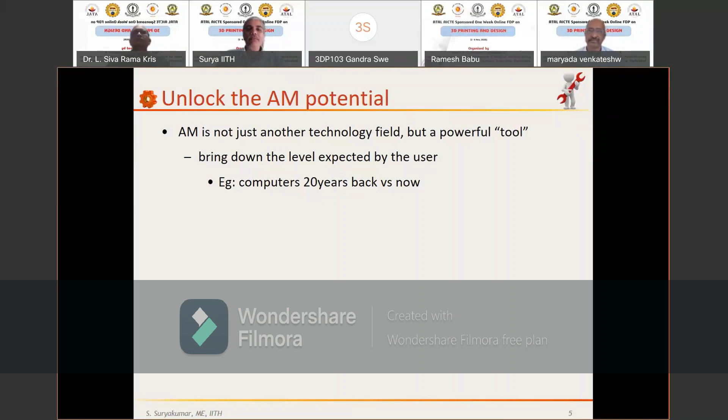AM makes all that unnecessary. Even a 10th class kid, without any necessary background, can design, conceptualize, and make his or her own models. That's essentially the whole idea here. I usually jovially put it this way: additive manufacturing or 3D printing makes manufacturing possible for people with no manufacturing background. It is like manufacturing for dummies. It's like the calculator for mathematicians. Gone are the days when you need to do multiple calculations to do a simple trick or a simple geometry calculation.

For example, the way mobiles have helped your milkman or the paperman compute the monthly bill very quickly. In the same manner, the arithmetic background is not needed, but the task is done. So this is a similar facilitator when it comes to manufacturing. We look at it like a tool, where additive manufacturing is very user friendly and easy to use, and digital fabrication makes all this possible by looking at it like a functional tool rather than as a specialized job.

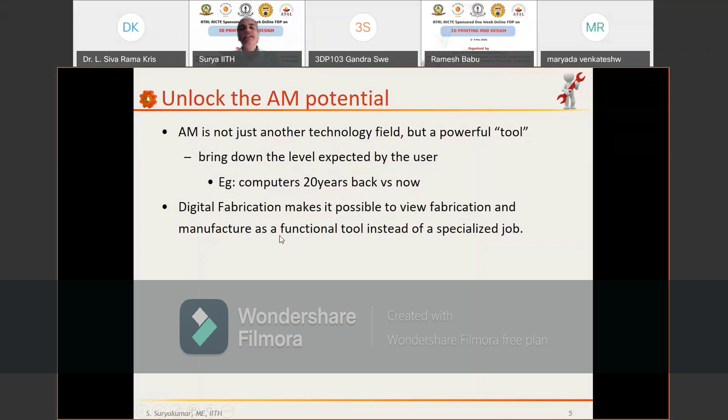And this is my favorite quotation, paraphrased from Mahatma Gandhi: not mass production, but production by masses. I think Gandhiji meant it in the context of mass production and big factories versus rural industries. But the same quotation is equally applicable in our context today, where to make something you needed a setup, a machine, lathes or CNCs or shapers. Now you just have a simple 3D printer which will cost you probably 20,000-30,000 or maybe 1 lakh, and you can make things at your own convenience. So it makes manufacturing possible by the masses. I think that is one of the biggest benefits of additive manufacturing or 3D printing.

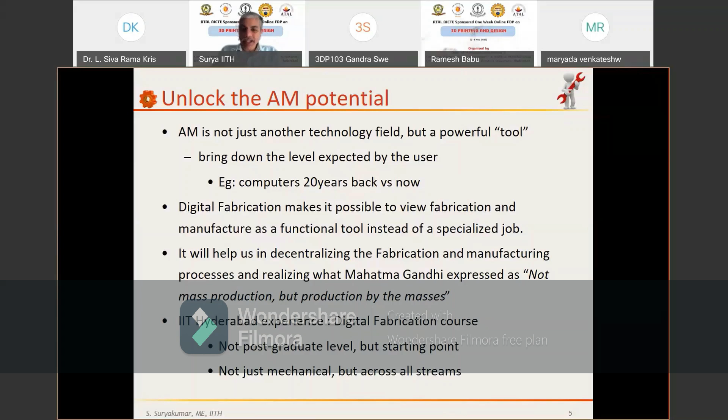And the same also applies in the learning sphere. Computers are a good example. Computers and programming used to be very high level in the earlier stages, then became first year courses, and nowadays schools advertise it, although I really hate that. But the point is that as the technology matures, it becomes easier to understand and practice. The same happens with mobiles. The first time I got my mobile, I read a huge user manual from top to bottom: this is how you add a contact, this is how you delete a contact. And now our kids manage our mobiles better. So as the technology matures, it becomes simplified.

And the same, in our opinion, is true with additive manufacturing, digital fabrication or 3D printing, whatever you call it. Our vision is that 3D printing is not necessarily just a PG level course or an elective, but something very fundamental and basic today for every engineer, not just mechanical engineers. Just like graphics or engineering drawing is the language of engineering today, where you are able to communicate, draw something or codify some idea.

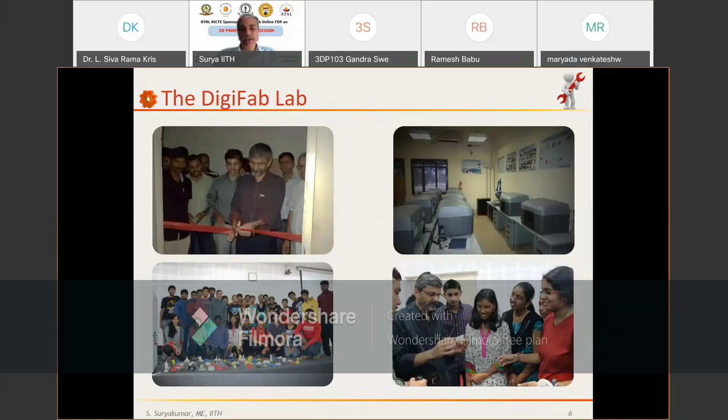We said, look, not as a postgraduate course: every first semester BTech UG student who joins IIT Hyderabad will be taught 3D printing in the first semester itself. And it's not just mechanical, electrical, computer science, metallurgy. Every student who enters IIT Hyderabad has familiarity with 3D printing as a basic tool. So tomorrow, whatever project he or she does, they have the ability to convert that idea into a reality.

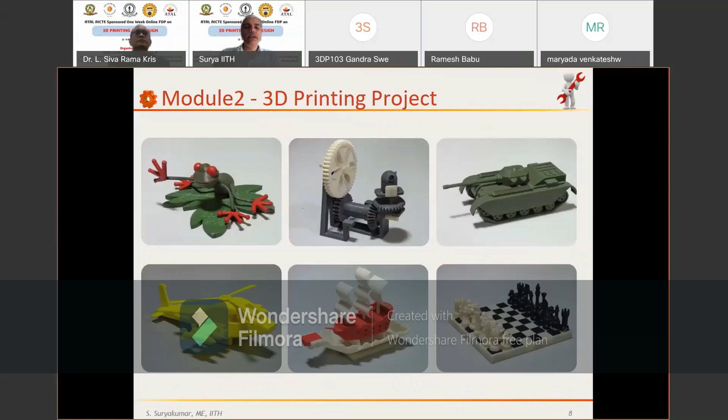So this is how the course goes on. In the first part we teach them CAD modeling, and in the second part they do projects on 3D printing of their own choice. So I think that is the background we are looking at today, where 3D printing is no longer just hi-fi high-end stuff, but a basic tool. And how do we capture that tool? The whole idea is how do you redesign the concept? So these are the various points related to it.

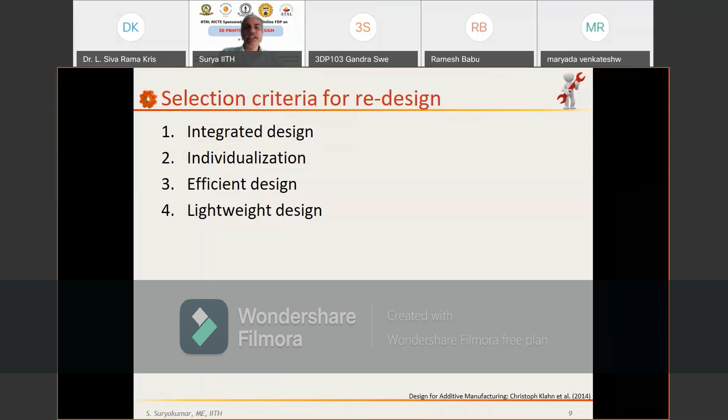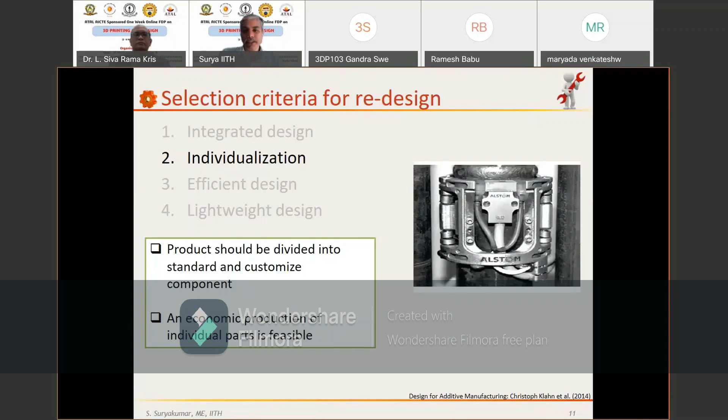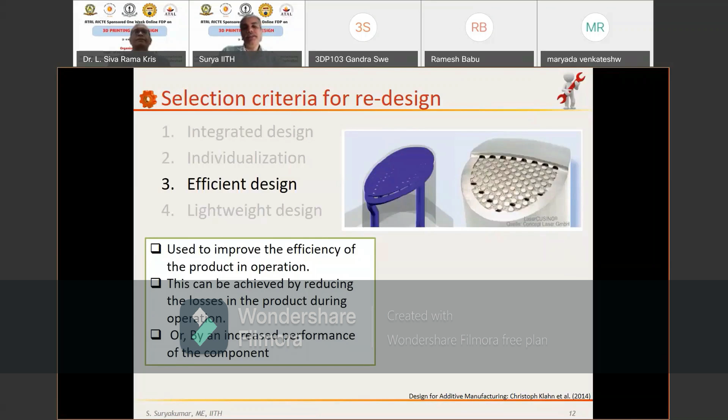The second is how a component can be individualized into a particular product, a particular individual geometry, individual shape, etc. The third is how do you efficiently design the component for the operation or the required purposes, or to increase the efficiency. And the fourth is how do you make it lightweight: optimize the weight, optimize the performance, etc. So these are some general selection guidelines which are given in any textbook.

To summarize all this, essentially there is the primary objective and the secondary objectives, and based on that you have to carry out the redesign process. For example, in a medical device, the requirements of the patient are the primary objective, and the secondary objectives can be weight reduction or cost reduction or lot size, etc. Whereas if you are talking about a mold insert, maintaining a constant temperature or a constant flow rate becomes important, and efficient cooling and weight reduction become secondary objectives. So for any design or concept you are working on, it's important to list out the primary and secondary objectives and accordingly work on redesigning these concepts.

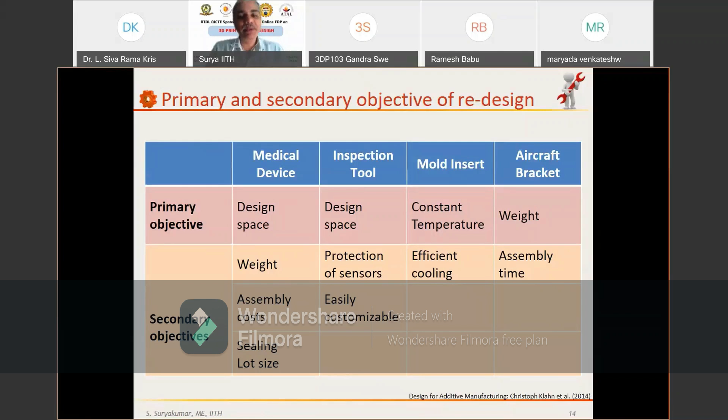I think this looks very abstract, I realize that. But don't worry, I'm going to give you examples of each of them to make it convenient for you to appreciate. So how do you do that? The major emphasis here is to understand the requirements of your AM parts correctly first. I think that goes in the first set. So this is my favorite example. First, to design for 3D printing, you have to.

When you're designing for 3D printing, you have to first realize what is the background, how 3D printing works in a system. The fundamental thing, apart from all the other details, is that 3D printing works in a layer by layer manner, in a sequential layer by layer manner.

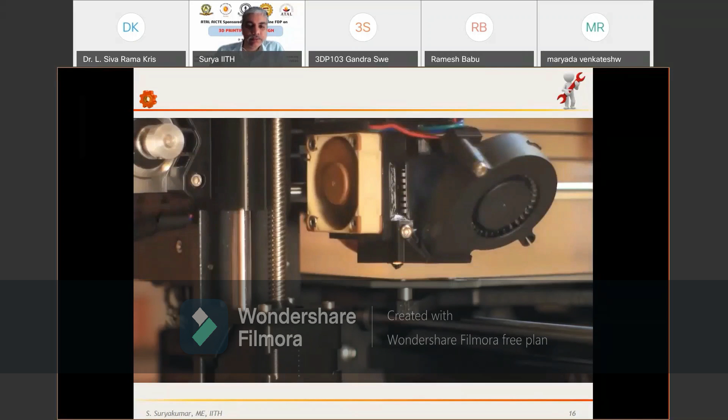I think this is a nice time-lapse video of some of the builds. Most of it you already know, but the picturization is beautiful, so I think I would spend 2 minutes putting it out. That's kind of how the process evolves, how layer by layer the process is going to evolve.

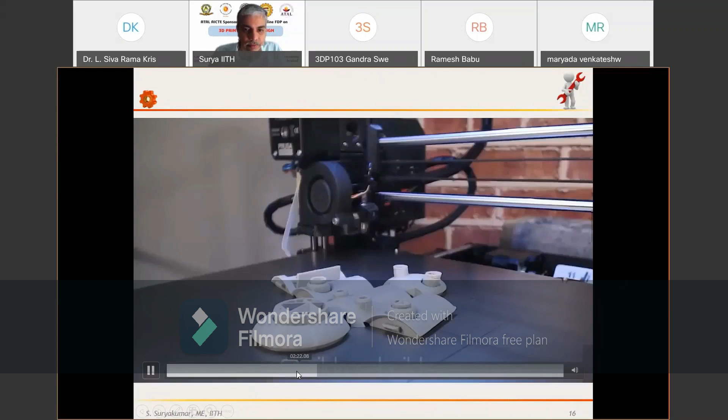So again, I think this is one good example. You see the designer has completely designed the component. It's very complicated, of course. But if you look at how it is evolving, you don't need support material.

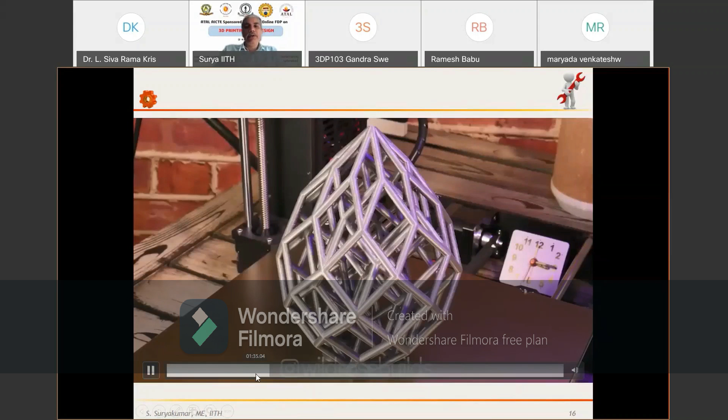Although the shape looks complicated enough, the designer has ensured that at each level, the overhang is just little enough so that support is not needed. Otherwise the whole component could have become much more complicated. So that is how you control your angles, control your peripheries, etc., so that complex shapes can be manufactured without any support material. That's a good example of how you can rethink the design to suit your support material requirements, to minimize those options.

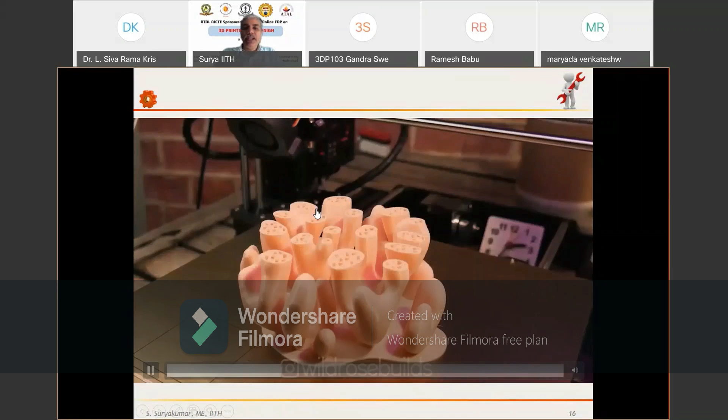Also, observe how the infill pattern is happening here. The infill is actually optimized at every location, so you don't see the material fully filling all the internal space and unnecessarily wasting a lot of time. This is actually what you call gyroid infill, and even the shape looks beautiful when you look at it.

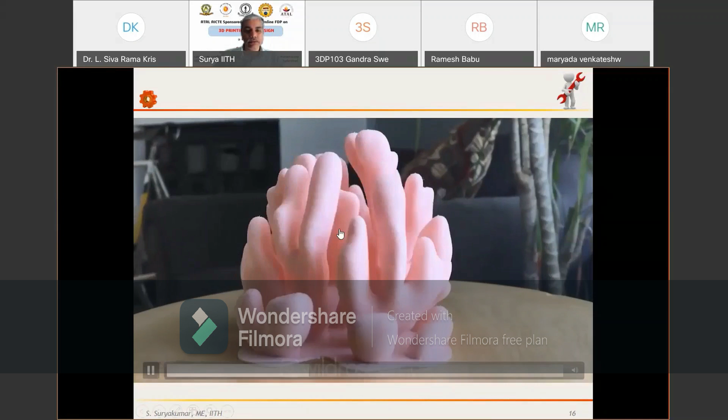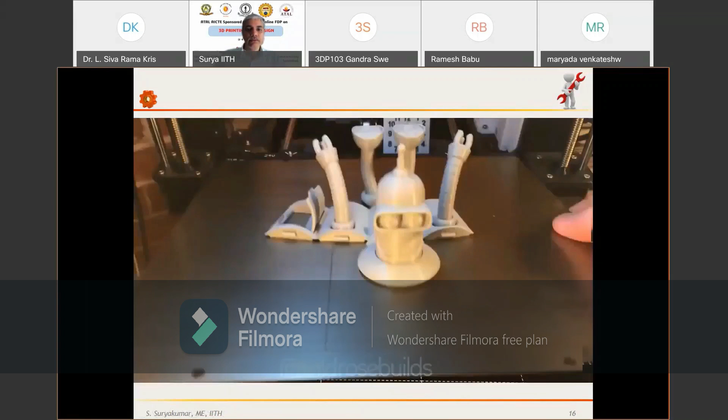Again, some more examples of how you can build some things. A lot of examples you can think of.

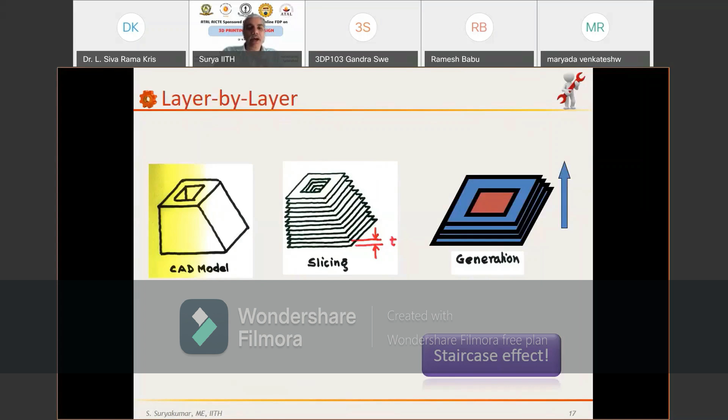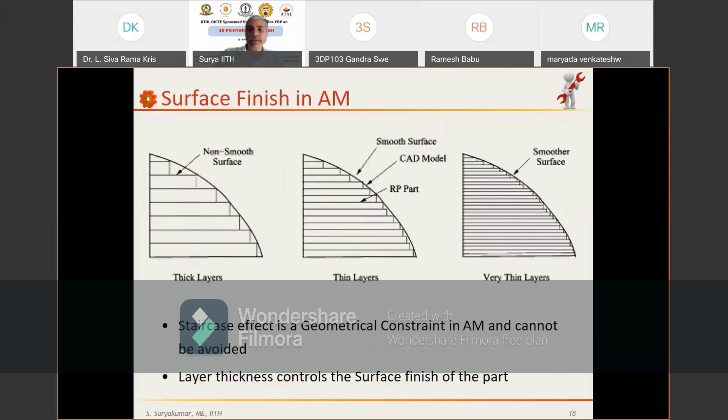The important thing here is whenever you are talking about additive manufacturing or 3D printing, it is layer by layer, of course. That's obvious. But how do we consider that and realize it in our design is what makes it important. Because of the layer by layer method, there is going to be a stair step effect. The greater the layer thickness, the greater is going to be the surface roughness, and the lower the layer thickness, the lower is going to be the surface roughness. That's always something you have to live by.

But how does it impact the part orientation? For example, imagine a simple cylinder, the same cylinder, in one orientation essentially vertical and the other in horizontal orientation. In the XY, the machine is fairly accurate; only in the layer direction, the Z direction, is where your problem comes.

So between A and B, if you want a smoother finish, the vertical direction cylinder gives you much more smoother finish than the horizontal, because here the layers form in a sequential manner, and a stair step effect is going to come on the inside of the component. Whereas for the vertical orientation, that stair step effect is not going to come along the Z axis, and in the XY axis there is no stair step effect. It can be much smoother and much more convenient.

I hope it is better now. So this is the same simple cylinder, but in different orientations, and you are essentially going to get different roughness or different smoothness across the layers.

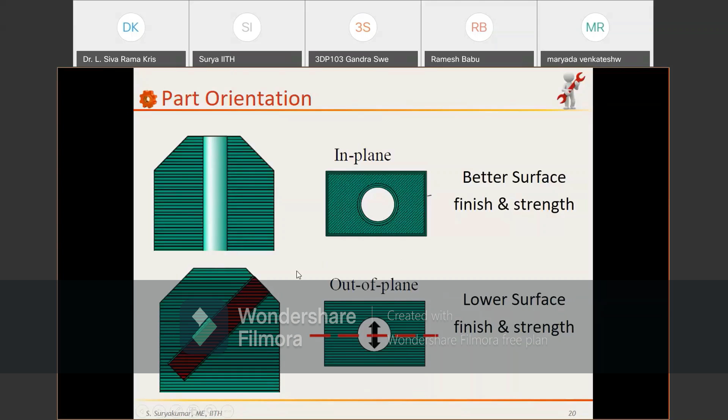This is the basic reason why it is happening: if it is in the plane, every time it's the same circle which is overlapping across the layers. Whereas if you have a hole which is angled, this stair step effect you see here is going to come in the layers.

Okay, so this is the reason why a simple part orientation affects so much. Similarly, if you have a component like this, I think I mixed up which is right and which is wrong - actually this is right and this is wrong. The reason is what matters here is the step thickness.

The step thickness has to be, for example, 0.17, so I need 0.17, 0.17, 0.17 steps. If I do that in this fashion, what would happen is it will approximate that value to my next layer thickness. So if 0.15 is my layer thickness, instead of 0.17, it will do it with 0.15 - instead of 170 microns, it will be 150 microns. It will always approximate to the next layer thickness.

Again, the next step is going to be 300 microns, next is going to be 450 microns, though the intended value was 510 microns. So something like that. It's important how even a simple step like this is, if you want accurate shape or accurate geometry, how you can reorient it. So part orientation, of course, will depend on the accuracy required.

Similarly, you also have to realize what is the minimum feature resolution your component or your machine can comfortably do. For example, this is a test we usually do with any new 3D printer - we create walls of 0.25mm, 0.5mm, 0.75mm, 1mm, etc., and see if the 3D printer is actually making the same component with the desired shape or not.

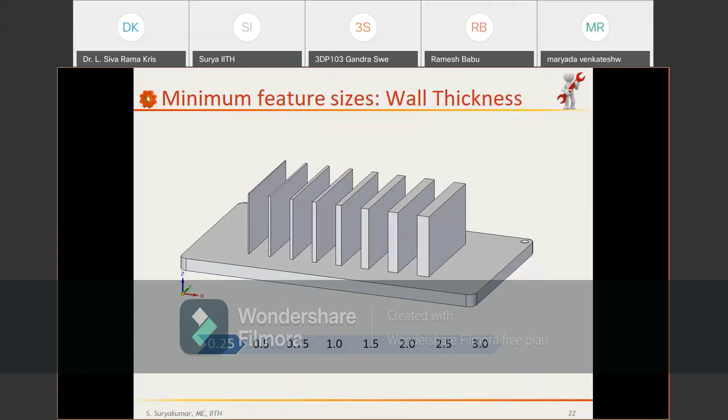I'm usually sure that in 90% of the cases, the 0.25mm wall is not made properly - it's approximated and made into a thicker wall of 0.5mm, etc. So it's important for you to realize what is the minimum thickness you will realistically get in your 3D printer. This value changes from 3D printer to 3D printer, setting to setting, etc. So it's important that you get and calibrate that value for your 3D printer exactly every time.

The same goes for the gap also. Every time we think there is a small gap here, but eventually what happens is that gap gets filled up and you don't realize any gap there - it's completely filled with material.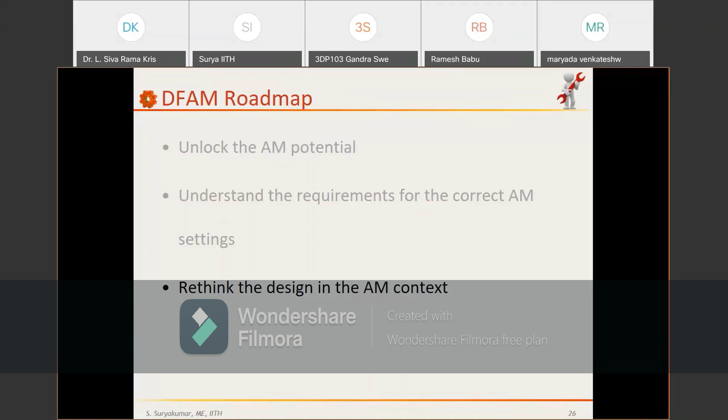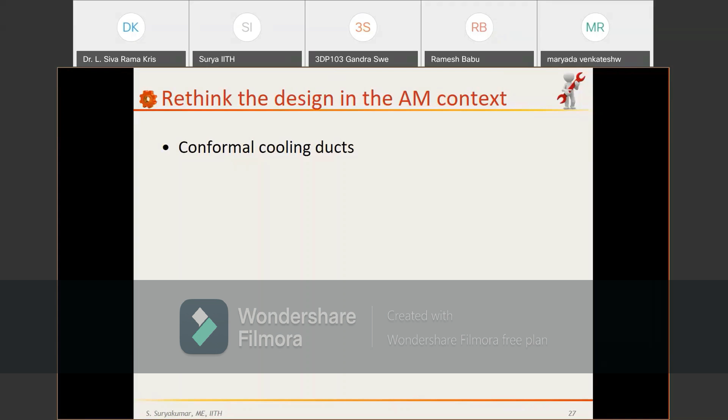The next idea is how do we redesign or rethink the complete design in the additive manufacturing context. For example, this is my favorite example - every time somebody talks about conformal cooling ducts, by default they always think the ducts are circular. Most of the time the ducts are circular because they are made by drilling in most tool rooms, etc. But when you're talking about 3D printing, why should it be circular? It's essentially just a habit of creating a hole.

But in the additive manufacturing context, circular holes are not really easy. In fact, a triangular hole is much easier. Usually when I say a hole, people will always default to thinking of a circular hole, because they're so habituated to traditional manufacturing, to milling, to drilling, where a circular hole is the easiest. But in the 3D printing context, the circular hole is not easy.

A circular hole will need a support material to be added inside, whereas a triangular hole, at 40 degrees, 50 degrees, etc., can be easily realized by the inherent overhanging ability of the material. You don't need an additional support material if you are using a simple triangular hole.

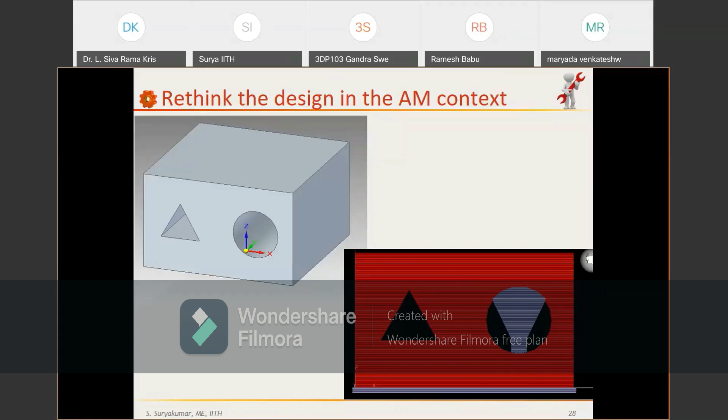The purpose is necessarily just to extract heat and to cool down, so maybe circular is not necessary — triangular may be much more efficient. We have to redesign and rethink how we are doing things in the additive manufacturing context, and get rid of the habits that come with traditional manufacturing. This self-supporting angle itself is adequate enough.

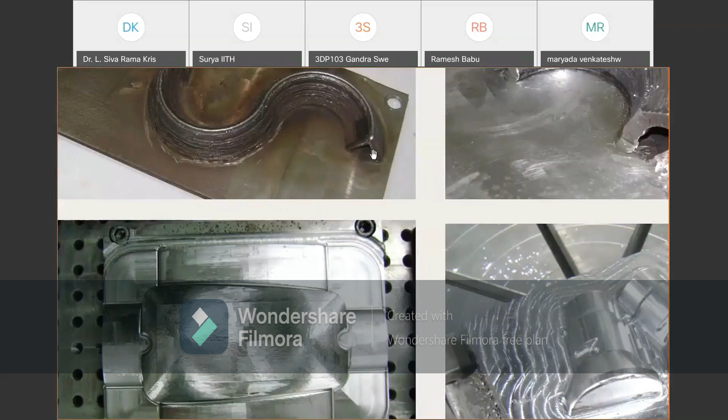So these are some examples which I have used. Look at this shape — this is what we have done without any support material. You can see the two triangles converging, and these triangles can go around across with the same cross section very easily. Now if it were a circular hole, it would not be easy to achieve or develop.

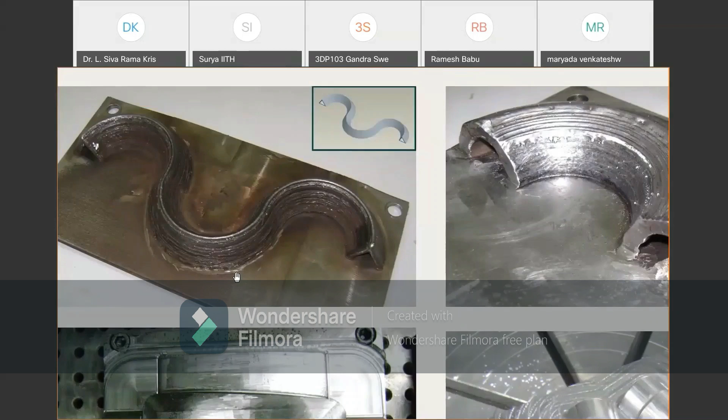Similarly, we have also done some injection molding tools using the same concept. This tool has internal ducts inside it, where the duct goes inside following the profile of the geometry and comes back outside. We could do this in metal without any problem, by using the inherent overhanging or triangular duct design, as we said. So this is another example of how we can redesign and rethink design in the context of 3D printing.

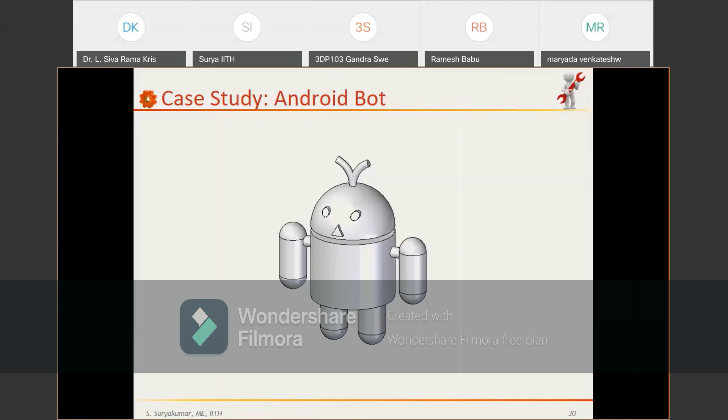So this is a simple Android bot, just a simple 3D model. Now I would demonstrate how, by making small changes, you can make a lot of improvements in the way it's designed for 3D printing. This was designed by me, but it's a standard Android bot — nothing important. If I run this STL file or CAD model in my 3D printer, it takes 445 minutes to make, 109 cubic centimeters of material, and 17 cubic centimeters of support material to manufacture.

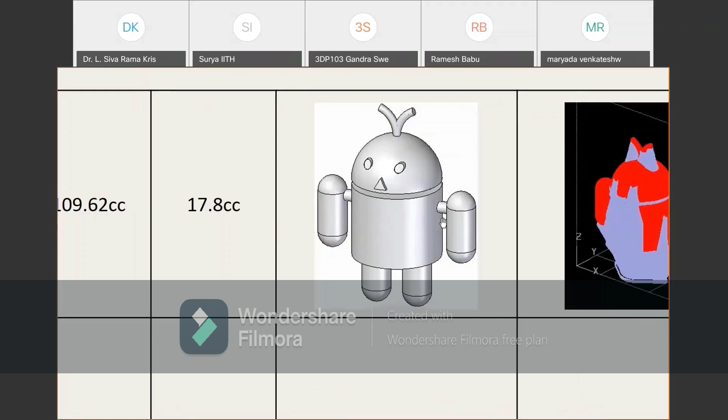Now, the first thing that bothers me about the component is these links. It looks very nice — you have a hand and a joint, etc. It is very habitual for us to design in this fashion. But when I'm thinking about fabricating it via 3D printing, this is a strong hand and this is a weak link for me. Once I start thinking as a 3D print designer, that little joint becomes a headache, or an issue, for me.

So the first thing I can do, for example, is make the hands — it's an Android part, of course — assuming you can make those changes, since the design space allows it. If the design space doesn't allow it, it's a different ballgame. But how can we make simple changes as a designer to facilitate how the whole process goes on? Just by making the hand and the link very minimal and merged together.

What you can see is I've brought down my timing from 445 to 431 minutes, and I could save 3% in cost and 15% in support material. But more importantly, my component is now much stronger. I don't have any issue cleaning the support — I can comfortably clean it in a rigid fashion without worrying about a broken hand.

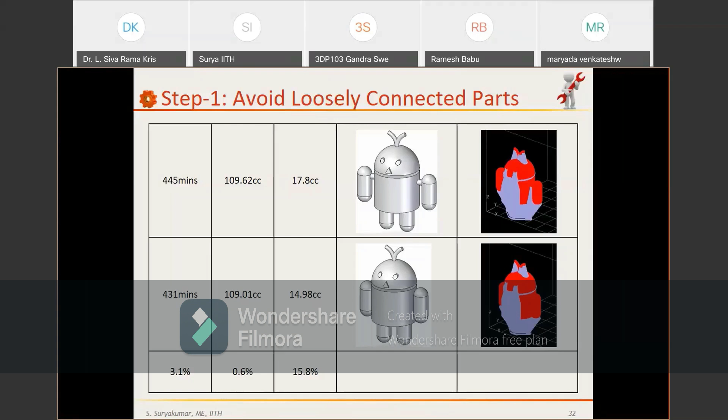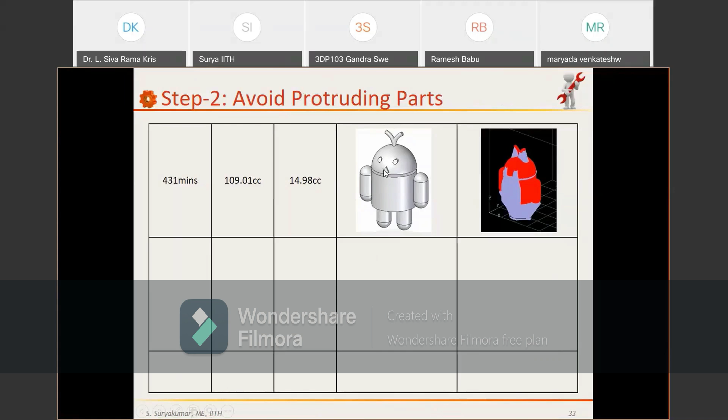So my model is now much stronger and much easier for me to do the support material removal. Then again, what else can we do? Usually our habit is whenever we talk about an eye or an ear, etc., we always think of a protrusion. If you look at this component, I have protruded the nose there. That's our usual habit when you are drawing or when you are designing.

But in the design intent, just to realize that small nose and ears, the supports have to be employed all the way up till here. So what I have done is made the material a notch geometry instead of a protrusion geometry. Again, I'm just illustrating this as an example of a designer, from that perspective. And you can see it has drastically reduced the time it takes from 431 minutes to 354 minutes. That's almost a 1 hour reduction right away, and a 27% reduction in the support material also.

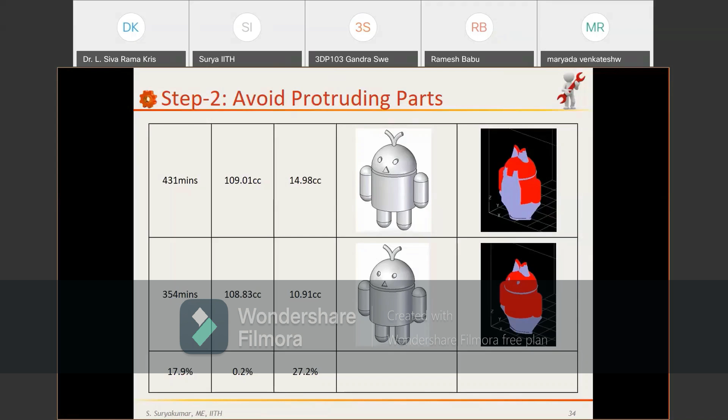So look at the saving I have made just by making the nose a cutout section instead of protruding out. It's a very simple change, but look at how much time and cost we are going to save by just that simple change. So this is where it stands.

The next place where I'm losing a lot of time is in the antenna on the top. Why did I put the antenna like that? Basically because I'm habitual to circular antennas. But who says antennas have to be circular? If I just make a little 45-degree antenna there instead of a semicircular antenna, I can get rid of my support material there, because I'm utilizing the self-supporting material itself. With this one change, I'm able to make almost a 50% saving in the support material and almost an 8% saving in time.

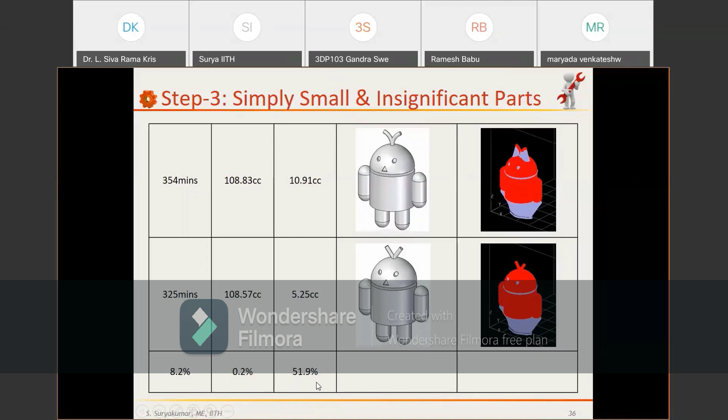If you look at all these totals, this is what I started with, and this is what I finally redesigned. I'm able to save almost 27% in time and 70% in the support material, without drastically compromising on the design intent and the aesthetics. That's important. So this is how you rethink the design in the additive manufacturing context, to design suited for additive manufacturing or 3D printing. This is one example.

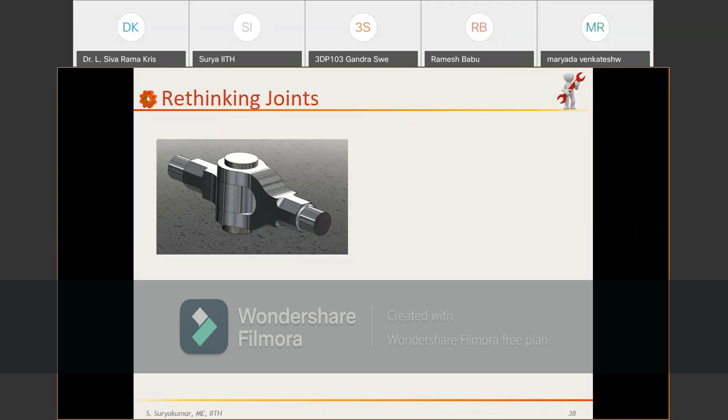The second example, my favorite, is about joints. For example, you are working on a robotic joint. The moment you have a joint, you always think of a joint like this: one hole here, one screw on the top, one nut in the bottom, etc. This is our standard habit, which is very true in the case of machining. This is definitely the best machining setup. Most industrial robots and most joints work with the same mechanism.

But the problem is, the moment you say you're 3D printing a robot, you simply borrow that same idea and say I'm going to 3D print this component, 3D print this part, and then 3D print the nuts, etc. And frankly, in my opinion, it looks really ugly. So can we rethink the joint suited for 3D printing in a different manner? Usually in 3D printing these kinds of joints are not easy. What are much easier are revolute joints.

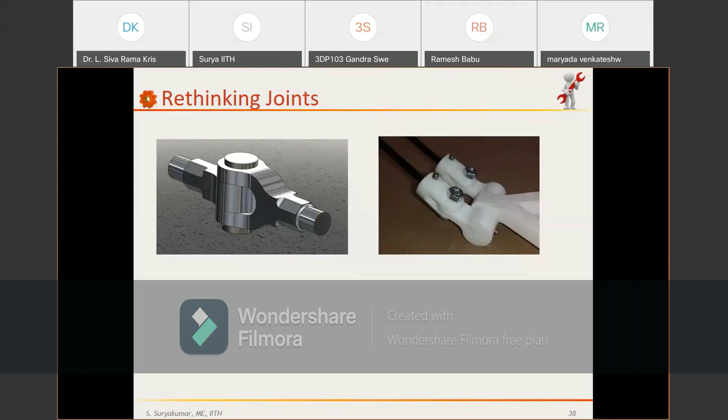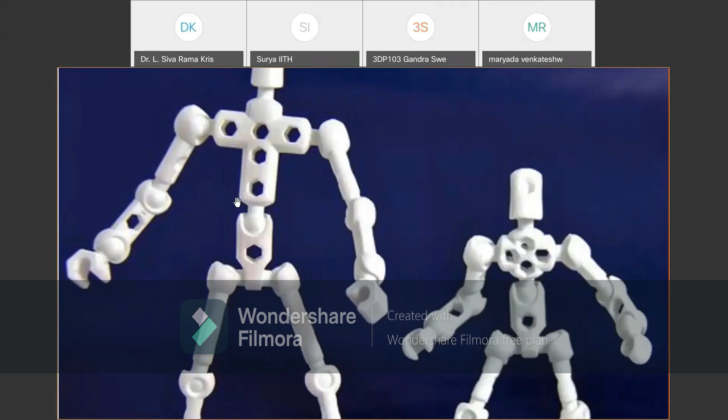If you pay attention, each of these is actually a revolute joint, and you get complete freedom in the movement. You see, the wrist can rotate, the wrist can bend, the arm can bend, the knee can bend, etc. So you have a lot more axes of freedom or degrees of freedom here, but with much more simple geometries which are suited for additive manufacturing perfectly.

But the problem is like this. The moment I am thinking about 3D printing a robot, I usually think this is how I make a metal joint and I'm going to replicate the same using 3D printing, and this is usually what we end up with. We should not do that. Whenever we are talking about 3D printing, we should also redesign or rethink which method is best for 3D printing. For example, this is how a revolute joint is best made with a simple geometry.

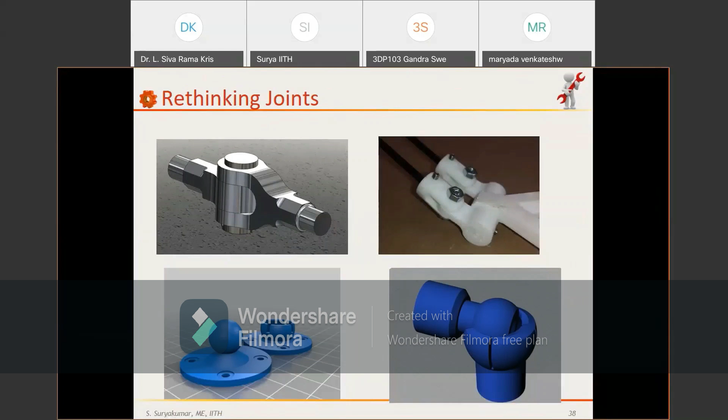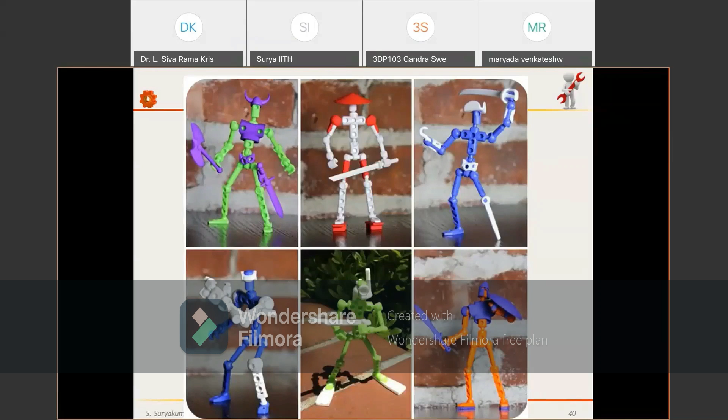In fact, you can create very jazzy favorite toys like this, and as you can see, it is completely customized. This is a Lego kit in figurines. More importantly, all the components here look complicated and sophisticated, but all of them can be 3D printed without support material. That's important: not just 3D printed, but 3D printed without the need for support material. That's the beauty of how you can rethink the design space, suited to how your printer works.

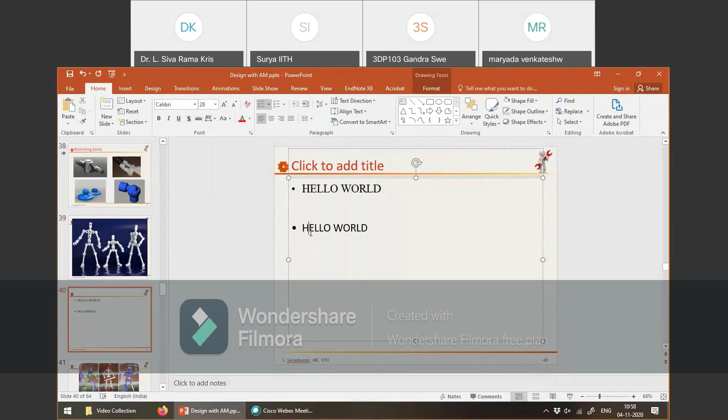And this is not just about joints; even the font you are using matters. Just to give an example, this kind of simple font you are using also makes a difference. In the top, I have used Times New Roman. It looks beautiful, but Times New Roman has different thicknesses at different zones. For example, the H here has two thick lines, whereas the center line is a single thin line, when I look at this simple H as an area filling code.

With an area filling code, my printer goes in this fashion, going here again, again going out, and filling it here. Here it's only doing it twice, and here it is doing it four times. You see how difficult it becomes to make a single H. Whereas with this font, it becomes much easier because it is a constant thickness.

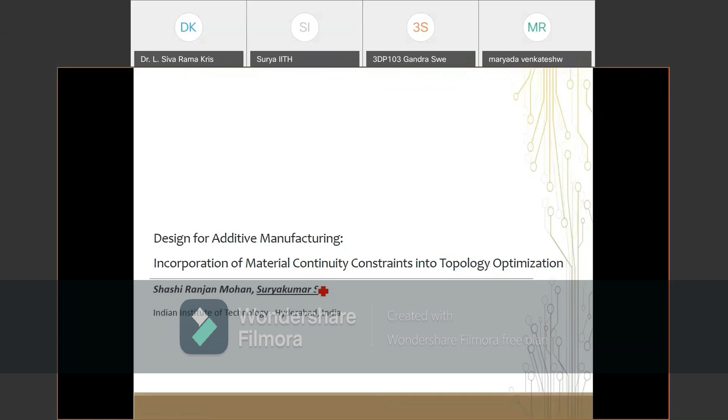I will briefly talk about our research here. We usually work in design for additive manufacturing, for example how to incorporate material continuity constraints into topology optimization. People talk about topology optimization all the time, but can you also include the additive manufacturing constraints into the topology optimization codes so that it becomes much easier to do them simultaneously? For example, a simple geometry like this, where you can have three holes.

But the problem is, if you have these 3 holes, what will happen is there will be first this green step, then the machine is going to pause, then the material is going to be withdrawn, and again another material is going to come, again start and stop, again start and stop, etc. Whereas in this design there are only 2 start and stops.

So for example, in a plastic model it probably does not matter. But if I am doing the same in a metal printer, with the laser being switched on and switched off so many times, it becomes a concern for me. So how do I consider these constraints in my design domain? This is something we are working on.

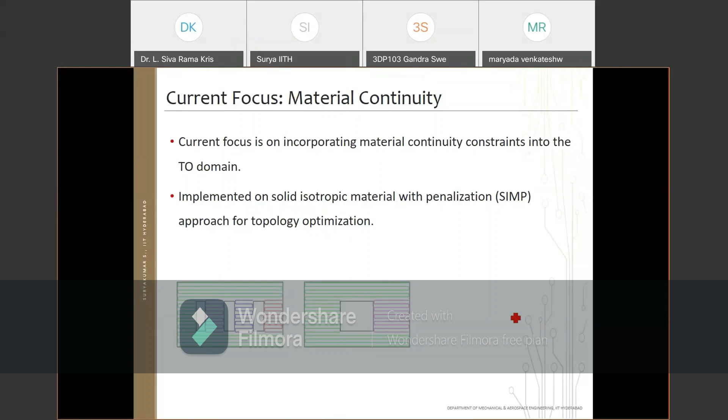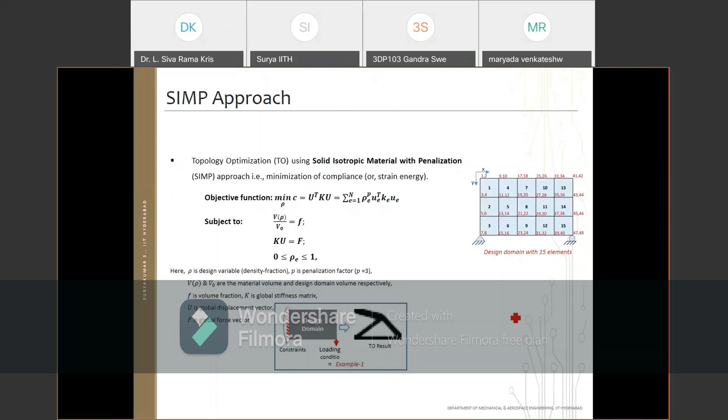So it's an automated code which runs. It takes the model in a pixel format. And it's not just in this component; you see that many times, for example, in simple bone geometries or knee joints, etc. The moment you take medical data, the CT scan data is very raw, and you have a lot of noise and a lot of small features which are very cluttered. So can we smoothen it out?

Can we get rid of all the noise around and make it smoother, easier to fabricate, faster to fabricate, and can we have a code take care of those requirements? That's the basic idea here. So these are some examples of how our code works. For example, this is a bad entity. Why? Because it is just a 0.5 mm line which is hanging out, and it has no purpose except to break very quickly.

So how do we modify it so that those stray elements are eliminated? Again, these are 0.5 mm, 0.2 mm stray elements, and you actually don't end up realizing them in any way. So how do you modify the components so that these become easy? That is some work we have been carrying out at our end.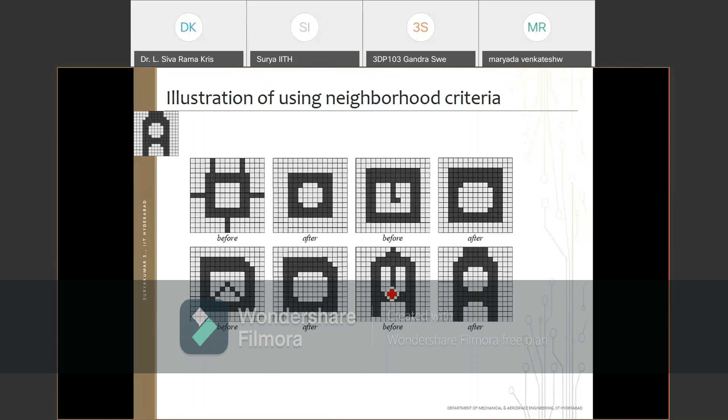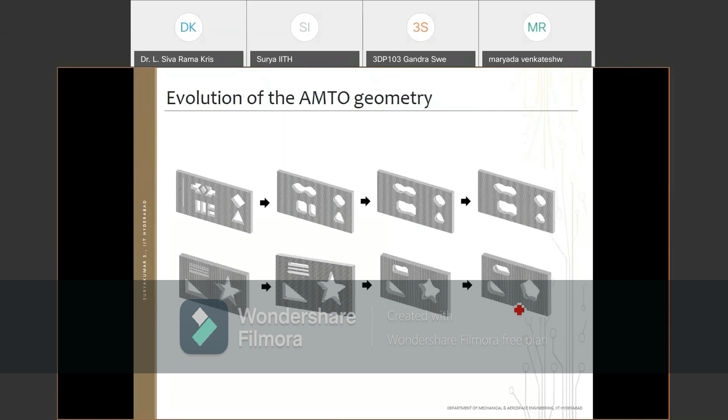So how we make it simpler for the geometries to be easy to manufacture, easy to 3D print, etc. These are some case studies of how we have done it and proved that it's actually better, improved, etc. I think all this I will skip.

So coming to the conclusion, I will emphasize the point that 3D printing is actually about making manufacturing accessible to the masses. I think that's the whole idea here, making manufacturing easier to practice. If you look at the global experience, 3D printing is not just one of the elements, but it's actually completely transforming the way fabrication, making, and product design is happening across the world. I just want to quote a few examples here.

You have the RepRap project, of course. Open source software is very common. You have Linux, you have a lot of other open source software, but 3D printing is one of the few places where open source hardware or open source machines are available and possible.

Similarly, you have easy to assemble kits which come in at probably 20,000 or 30,000, where you can buy the complete kit and assemble it at your own home for less than 30,000 rupees. So you can make your own 3D printer today with maybe less than 30,000. That's not difficult.

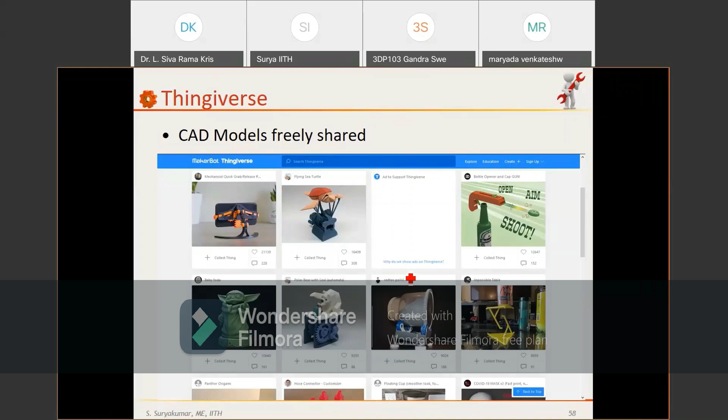So you just go to the website, you have beautiful CAD models. You can just download them, print in your own 3D printer and use them. So absolutely free. All the components, all the files are absolutely freely shared. And you have thousands of them on the websites. And this is one good example of how mainstreaming of 3D printing is also done.

So in the early days of COVID, in the April and May periods, when the traditional manufacturing was yet to catch up with the requirements of face masks and face shields, etc., a lot of innovation and a lot of activity happened using open source medical supplies also.

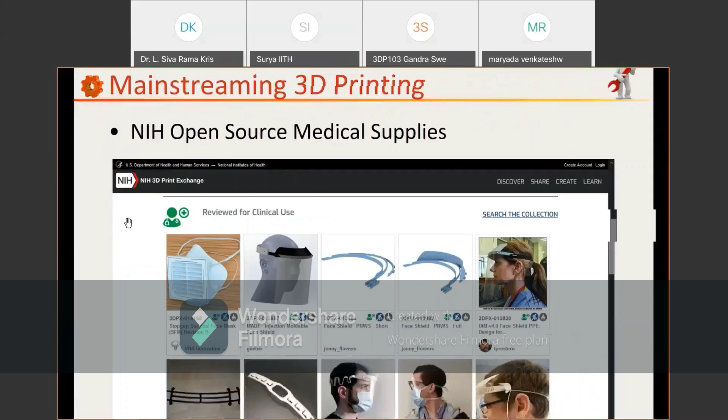In fact, NIH, the National Institutes of Health for the US, has created a subdomain for sharing components related to COVID use on their website. So you can just go to the website, download the components, download the 3D printing models, print them with your own 3D printer anywhere and freely share them, etc.

So this is one of those examples where 3D printing is not just a hobby, but has become a mainstreaming requirement also for such medical supplies, for such other clinical requirements, etc. So I think this is one example.

In India also there is a group called Maker Asylum. I think they are based in Pune or something. So they collated across all of India, and I think 5 lakh is the old figure. They have printed 10 lakh face shields in a very emergency manner, and shipped and shared them across India.

So this is again before the traditional injection molding, because injection molding takes you 2-3 months to realize the complete setup. Whereas all these efforts have been collated to meet the immediate requirements for the face shields, for the face masks, for the hooks, etc. And even in a humble manner, in a simple manner, people have attempted to contribute to the various requirements of the times.

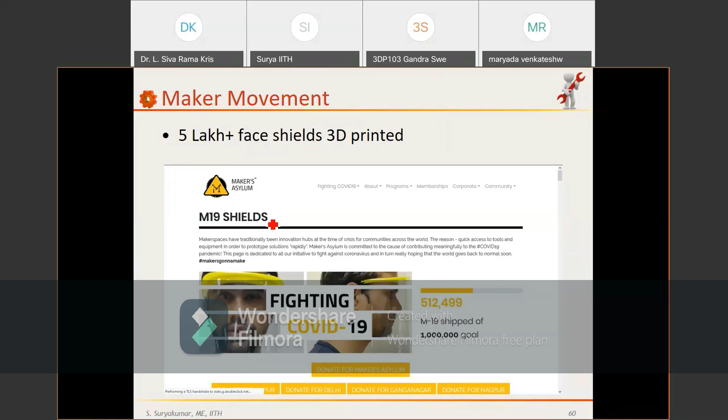We also have examples of how 3D printing can be taken to schools and colleges, how to visualize mathematics using 3D printing, etc. Sheffield is another example. So just to conclude in this regard.

Bringing it back to the Make in India context, in mass production China is always ahead of us. I don't think it is realistic to beat China in mass production, and frankly, I don't want to be. I've seen horrible videos of Chinese factory workers with 14 hour, 15 hour shifts, only one bio break and one bathroom break, etc. I don't want India to be like those factories of China. I want much better for my country.

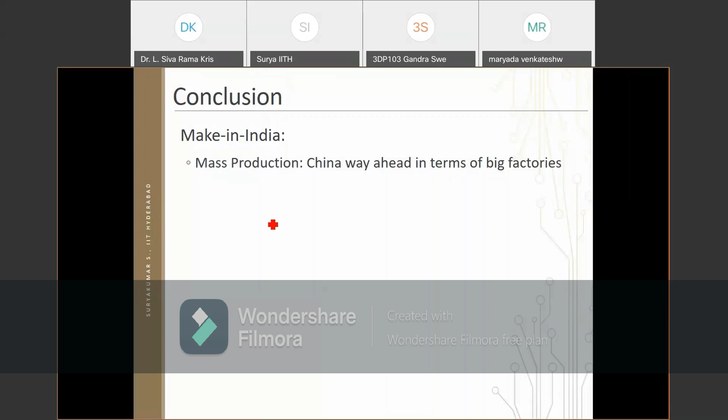But where India's strength vis-a-vis China lies is essentially in the service industry. Where we are exceedingly good is, for example, pharma, IT. Wherever individual attention is required, wherever individuals' priorities are important, we have been doing very good actually.

And if you look at tomorrow's manufacturing trends, it is not mass production, but mass customization which is going to happen. So mass customization, please underline, is in my opinion the future of tomorrow. It is actually a mixing of production and service aspects. And I think that is where India should aim to be the leader.

If you want to beat China, you don't beat it in its own game. You have to create your own game, a game which is much better than that. And mass customization is of course already a current reality. So imagine a scenario where you don't have even mass produced shoes, but where you go in, the scanner scans your foot and gives you a best fit geometry for your foot.

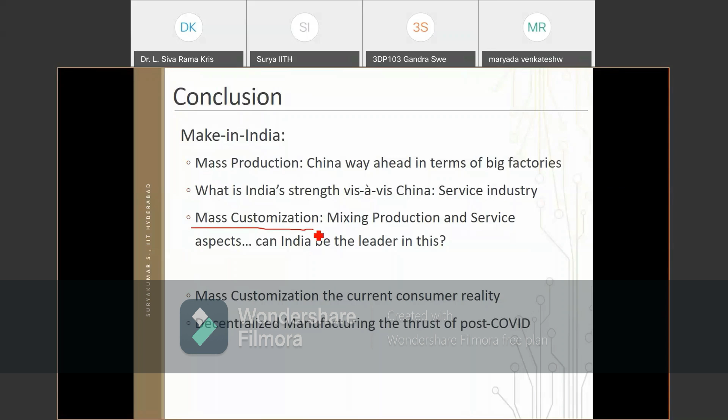Even if it is a 500 rupee extra, you don't mind it, because you get the best fit for your foot. So that is a real consumer reality today. And of course decentralized manufacturing is another thrust in the post-COVID scenario, and I think additive manufacturing, 3D printing, is the ideal tool for both of them.

The whole concept is essentially how do you mix these together. Mass customization is essentially about both mass production as well as individual or customized production, and 3D printing definitely is an important tool in that regard. For example, it may be implants, dental implants, even shoes or apparel, anything. Can we go for mass customization of the requirements? I think that's where the future lies, and additive manufacturing is definitely an important factor in that.

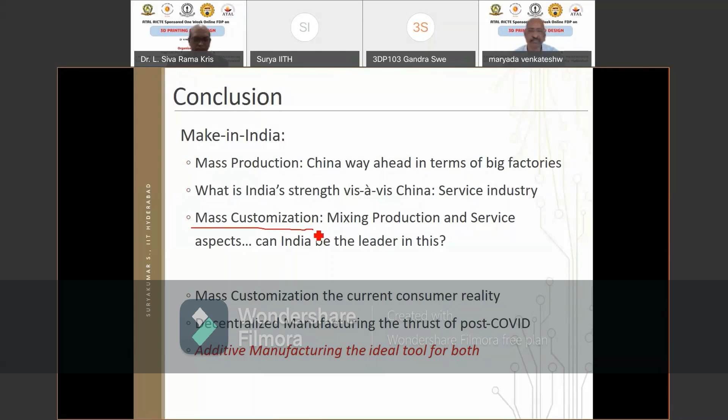Coming back to our topic here, unless we have design guidelines and are able to rethink the complete design atmosphere in the context of 3D printing, that will not be possible. So that would be how I would put it and summarize it.

I don't mean to be offensive here, I mean it in a well-intended manner. I usually keep saying 3D printing is manufacturing for dummies. It is like the calculator of a second-class failed person. So even if you have no idea of any manufacturing, no idea of milling, casting, or anything, 3D printing is more suitable for designers than engineers. Every mechanical engineer in college does one year of workshop, carpentry, milling, drilling, all that. Whereas artists don't necessarily undergo all that training, and this is a technique where no background is required. So in fact it is more convenient for designers and artists for 3D printing, I would say that.

3D printing doesn't have any boundaries, sir. It breaks everything. Yes, correct. It's only your thinking, your creativity, you can apply it everywhere, anywhere, anytime.

One person is asking, that is Chithambaram, can you tell me any online platform that helps to learn the 3D printing design software programs?

Design softwares I am not familiar with, because there are no particular design softwares per se. If you are working in medical, you have some design softwares like Mimics, etc. If you are working on metals, you have these residual stress tools like Abaqus, so it depends on the application specific. So to my knowledge there isn't one. Yes, ANSYS has come up with its own design thing. I think 3D printing is a tool, please understand that. What design you are going to learn is driven not by the tool but by the requirement. Which design software you use is decided not by the 3D printing but by your requirement. So if your design requirement is medical, you have to go for Mimics, for example. If your design requirement is mechanical or heating etc., you may have to go with Abaqus or something. Unfortunately, I don't think there is one particular arena where it's available online, it's mostly still available only in colleges.

Many softwares, for example Slic3r, allow you to randomize the starting point. Many users usually don't use that option. So usually what happens is, even in a cylinder, you have a row where a line is always starting at the same place again and again. But most softwares allow you to randomize the starting point. In FDM, I know there are a couple - usually you have to go into the advanced option settings and randomize the starting point. The same is applicable in metal also, depending on the software you're using. But definitely, by randomizing the starting point, the problem of the bead, etc., is usually avoided.

But it's not eliminated altogether—that start-stop problem is there. I think that is why I was also mentioning my design for additive manufacturing. So how do you redesign so that the start-stop problem is minimized?

For example, if I'm going for a cylinder infill, I would actually prefer not 3 concentric circles, but a spiral. If I'm doing 3 concentric circles, I'm starting and stopping 3 times. Whereas if I use a spiral, increasing in size across, I'm using start and stop only once.

So there are ways to do some smart redesign, but that's very case by case basis. There is no one thumb rule or secret potion for every problem. But it is possible—that's what I can say. Many softwares do give you that option.